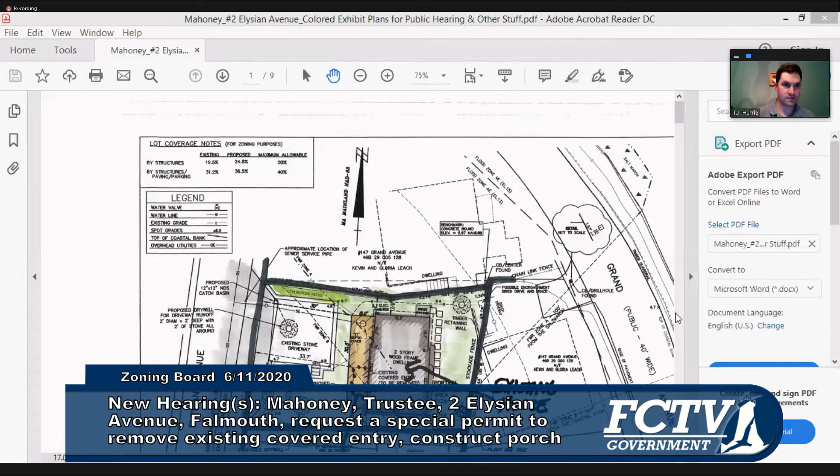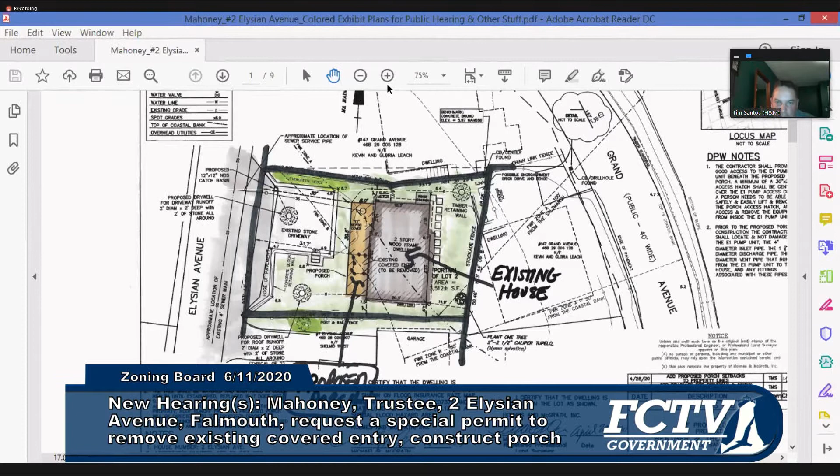Can you see that? We can. Okay, the property is located at 2 Elysian. It's currently developed with an existing single-family home and an attached covered porch right here. The property is currently a pre-existing non-conforming structure. It's non-conforming to the sideline, to the north and the south, and I'll zoom in. Currently, we are 6 feet to the north sideline and 4.9 feet to the south sideline.

The applicant is proposing to remove the existing covered entry and would like to construct a new covered porch. Those setbacks will be no closer than what exists.

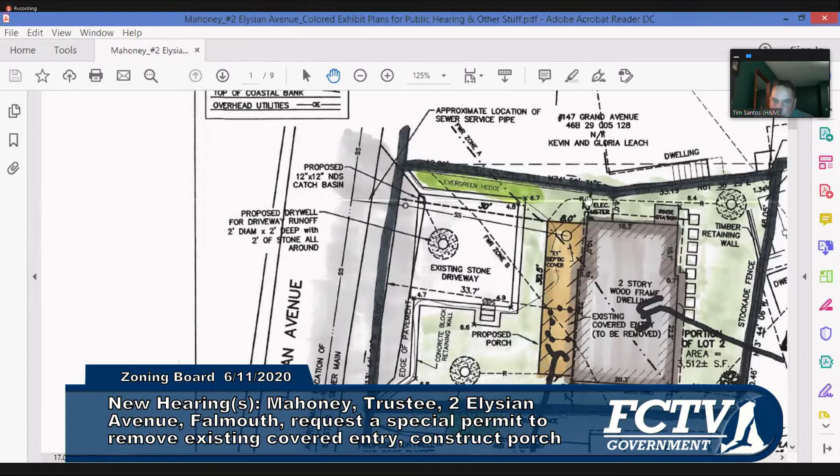It's actually 7 feet from the north and 7 feet from the south. So that is the special permit under section 240-68B for the minimum sideline setbacks of 10 feet. We're no more non-conforming than what previously existed. And we are also looking for a special permit from 240-69E for the lot coverage.

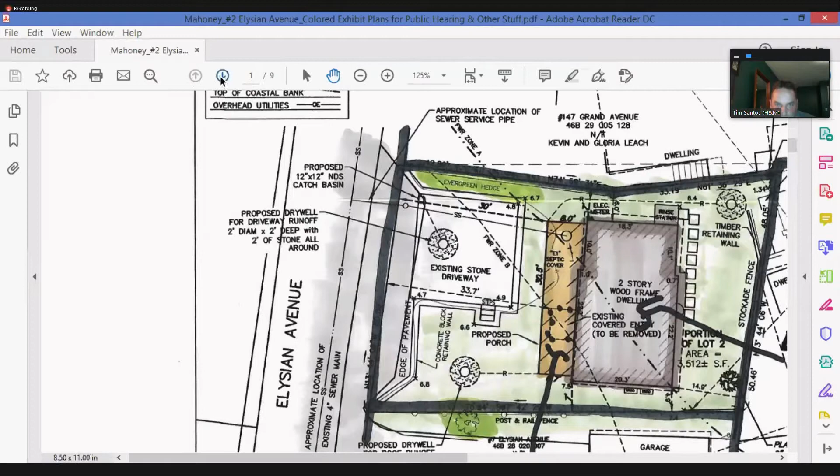We also submitted architectural plans showing the porch, if the board has any questions on those. I believe it's 8 feet off the north side and 6-7 off the southern side, and it's about 30.5 feet long. So we believe that it meets your criteria for the issuance of a special permit, and if the board has any questions, I'd be more than happy to address them.

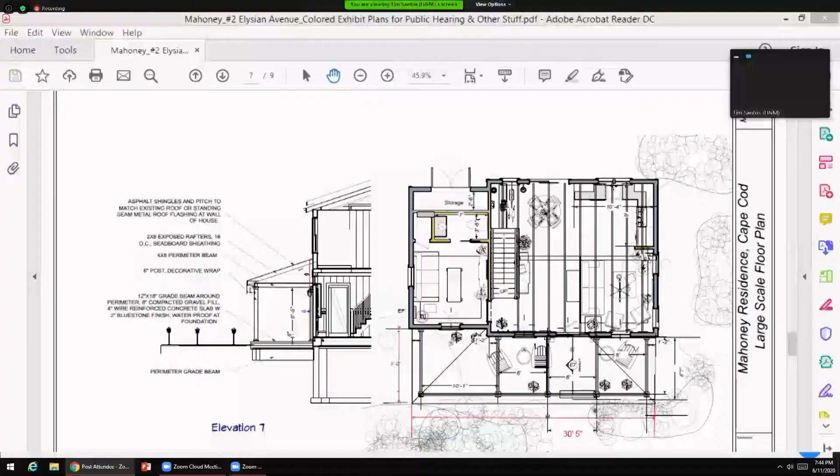Yeah, I'll share the screen again, just bear with me. If you look at the plan, there are DPW notes on the right side of the plan. We have spoken with Amy Lowell about how we're going to access that. An access hatch will be built over it. There'll be no sonotubes next to the unit, and all of the vent lines, the electric lines, and the sewer lines will be protected during construction of the proposed porch, if approved. We have spoken with her, and she was satisfied with the plan as long as we added these notes.

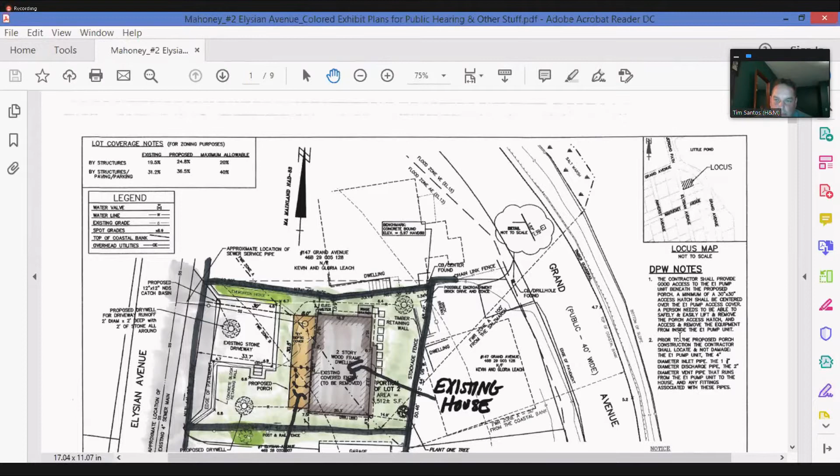Excellent, thank you. Thank you, Mr. Chairman. Thank you, Scott. Ed, any questions? No questions, it was pretty straightforward. All right, thank you, Ed.

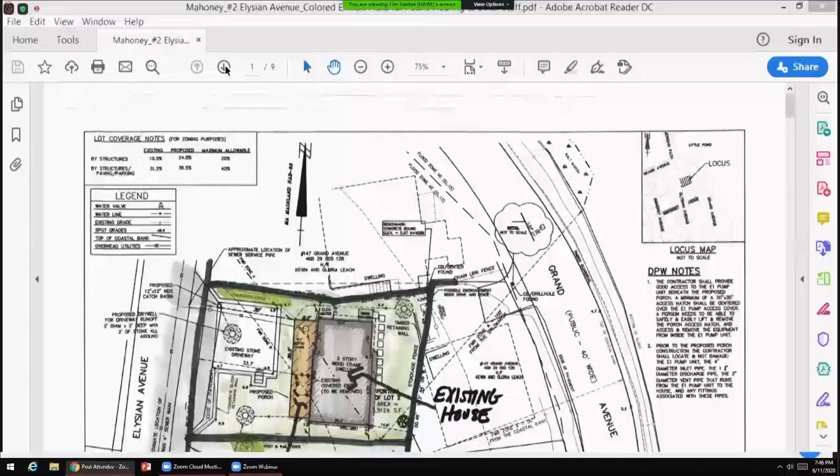And Mr. Santos, I do have a question specifically about those architectural pictures that Ken mentioned, and they would be A2 and A3 in the packet that you sent to us. It could be the angle, but it looks as if there may be an overhang that's going past the existing setbacks from the proposed roof for the addition.

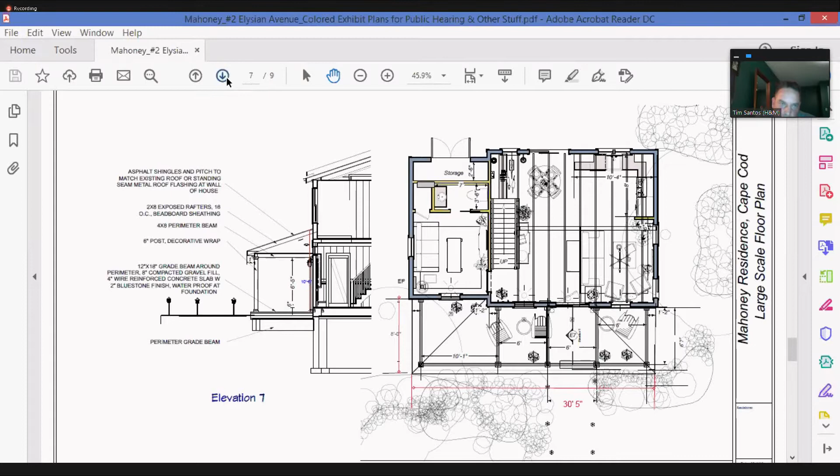All right, so if you look at this plan here, the 8 and the 30.5, or 30.42 - if you're talking about this overhang right here, can you see it? Sorry, I have to move everyone over. Yes, that, and on the opposite end as well, that's included in the 8 feet and the 30.4.

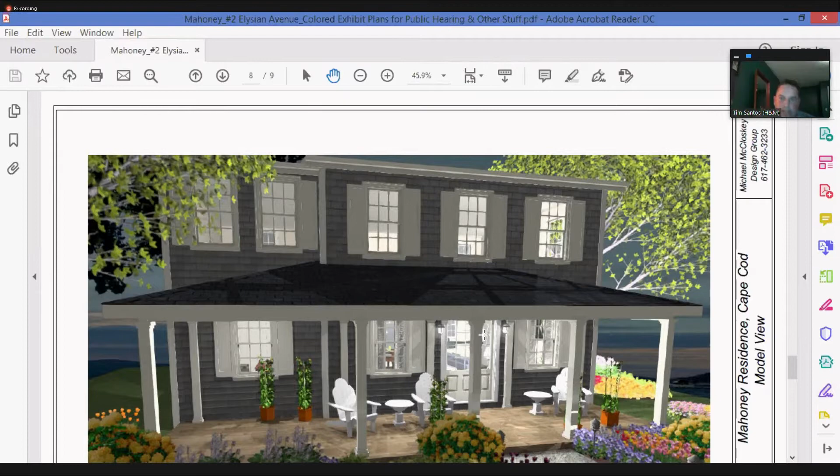Okay, so the actual patio below it is slightly smaller. So it's just a bit of an optical illusion there, the angle, I guess. Yes. All right. Thank you for the clarification.

Does anyone have any follow-up questions at all from the board? No. All right, seeing none, and there's also no public comment in the webinar chat. So is the board satisfied that we've heard enough? Yeah, I'm happy to move. Motion to close. Second. All right, motion to close.

I think that was from Bob and seconded by Ken. Full vote: Bob, Robert Dugan, aye. James?

Roll call: Ken Forman, aye. Ed Van Kuren, aye. Scott Zelinski, aye. TJ Hurry, aye. So the hearing is closed.

What would be the board's pleasure? Motion to approve with conditions. Second. Motion to approve made by Bob and seconded by Ken.

Findings: sections 240-3C, 240-68B, 240-69E, 240-216. The existing house is non-conforming to setbacks, 4.9 on the south side and 6.0 on the north side.

Applicant is replacing the existing entry with a porch addition. The porch will not encroach any closer than current setbacks, and the plan did setbacks to the overhang on the roof of the porch.

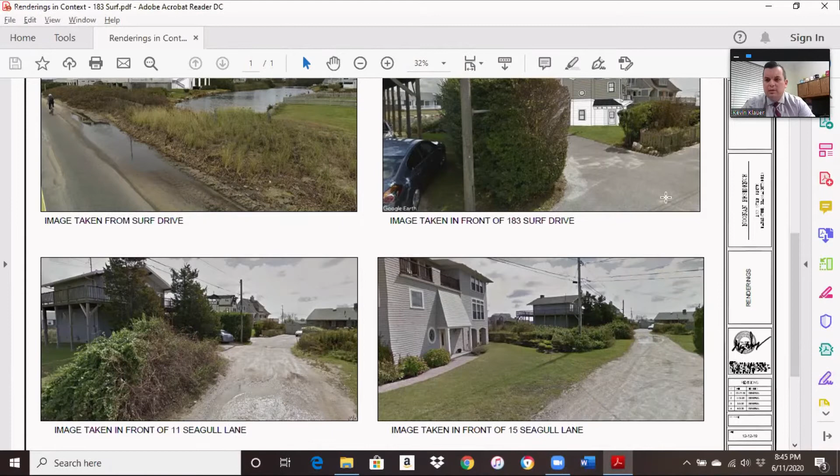So what we're showing is the image from Surf Drive, from the area that goes over Trunk River, an image of the structure directly in front of 183 Surf Drive, an image of the structure standing outside of 11 Seagull Lane, and then an image of the structure taken in front of 15 Seagull Lane. On the last one, I think you'll see that it's not even visible at that point.

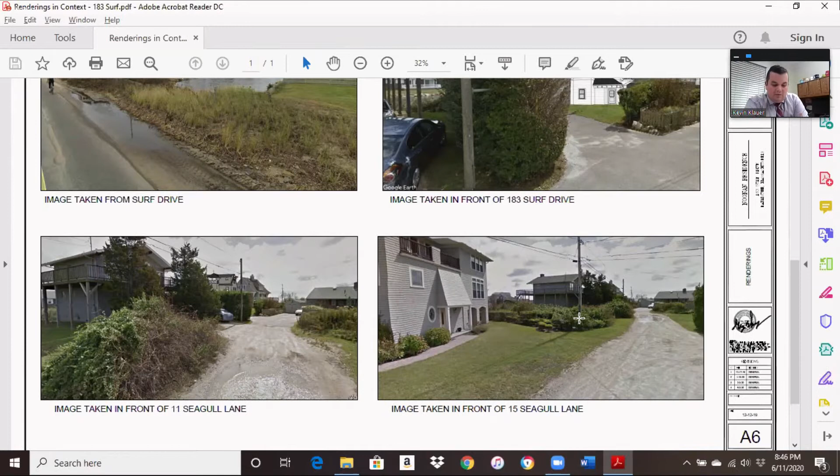It is a proposal that is in line with the surrounding properties. The concerns expressed by the owner of 11 Seagull Lane, Ms. Arquise, are positioned as though they're in the spirit of a neighborhood concern. However, these concerns are relevant only to her as the abutter directly to the rear. To the contrary, I think the neighbors support this. The board has consistently taken the position that they have not protected private views. Ms. Arquise does not hold a view easement, and she previously contested the permitting for 199 Surf Drive on the same grounds, being the same concern for her view. She's seemingly of the opinion that she's entitled to a water view, but no one else is.

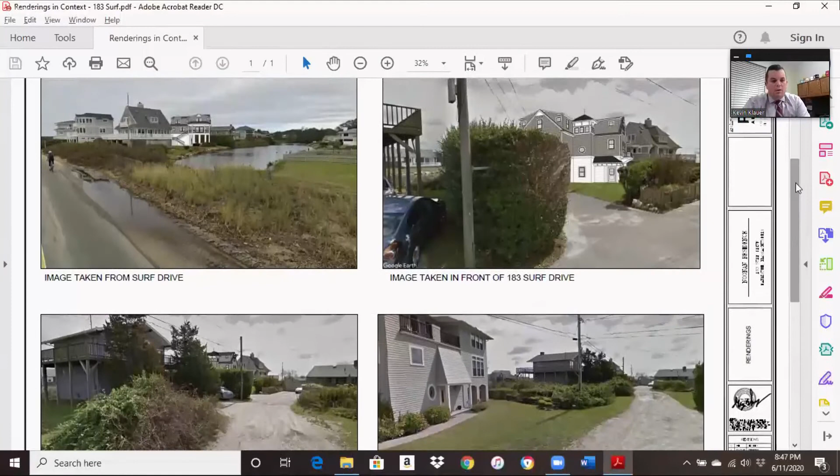Despite this, and I think this is instructive on the renderings, you'll see that Ms. Arquise will still have a very considerable view over Trunk River, Surf Drive, and Vineyard Sound.

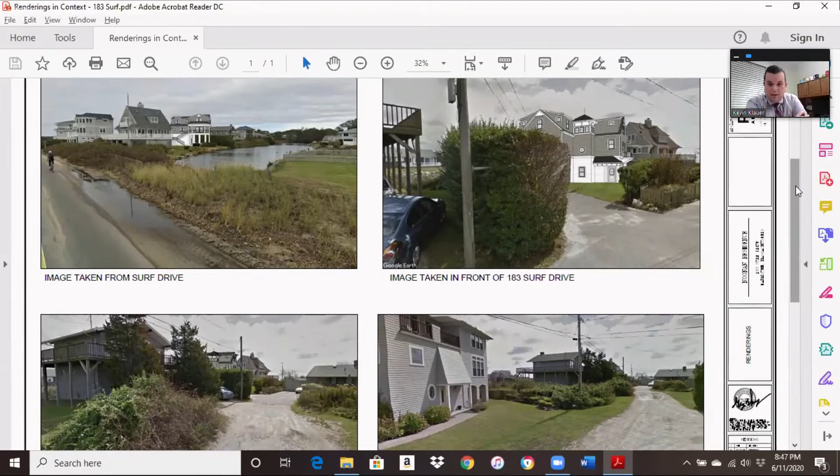It should be noted that if the Noonans sought only to reconstruct their existing house, similar size but raised to meet the flood zone elevations, to comply with those flood zone requirements, the resulting structure would have a much worse effect on the view held by Ms. Arquise. We previously submitted a lot comparison worksheet showing the lot size, footprint, and gross building area, because these are the standards the board has consistently used to evaluate the size and height of the structure relative to the size and height of the structures in the neighborhood, which is the standard in 240-69E.

I'm not aware of a situation where the board's chosen to disregard certain properties not accessed off the same street. I think to say that the houses in front of this on Surf Drive are not part of the same neighborhood is not a compelling argument. I think that this is an area that is really tied together.

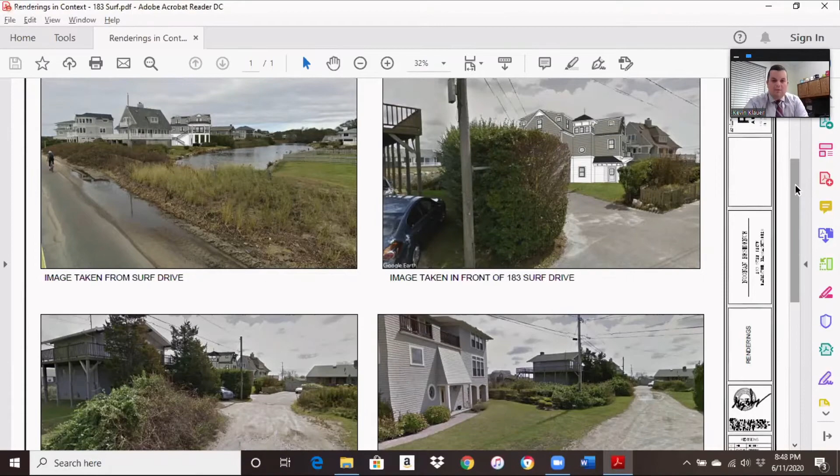Of those 26 dwellings that we did show the lot comparison for, 8 of them had higher gross building areas and 7 had larger footprints. We did also submit those photographs of 25 Seagull Lane, 17 Seagull Lane, 15 Seagull Lane, 11 Seagull Lane, 181 Surf Drive, 189 Surf Drive, and 199 Surf Drive, which I'd be happy to show.

Could you pull up the map just showing where those properties are? Sure, I'd be happy to. I'm going to have to use the GIS map, so bear with me.

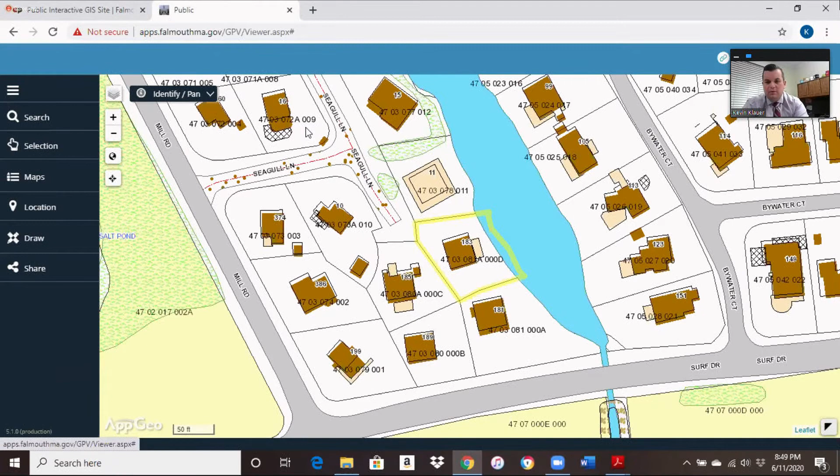So what we are looking at is the GIS map of the immediately surrounding property. We submitted the photographs of the properties at 19 Seagull Lane, 15 Seagull Lane, 11 Seagull Lane, 181 Surf Drive, 189 Surf Drive, 199 Surf Drive. So three houses to the south, three houses to the north. Of the 7 nearest properties, 4 are built of similar size and similar manner to what's being proposed, including the home of Ms. Arquise.

In just the last few years, the properties at 181, 189, and 199 Surf Drive have all been raised and rebuilt in order to comply with those flood zone standards. More will be required to do so as we move forward. Just 2 weeks ago, this board approved a similar proposal at 335 Surf Drive, essentially the same neighborhood, same proposed height. There was no real question as to whether or not it was a good project because it was an improvement over the existing situation, an improvement to the flood zone standards.

I think that we have to look at the totality of the situation here. We have a significant improvement to the property. We have an elimination of a non-conforming front yard setback, their compliance with the FEMA guidelines and the building code for flood zone construction, which really isn't an option. We're improving the vegetation in the resource areas. The project's in line with the neighborhood, and it's supported by a number of neighbors. The proposal is not substantially more detrimental than what exists.

And if you look at the GIS map, these three houses here are elevated. 11 is elevated, 15 is elevated, 19 is elevated. I think this house is not the one that's changing the character of the neighborhood. This house is staying in character with the neighborhood. As I mentioned previously, if they were to take the same exact footprint and build on that footprint in its exact location, the result would be, I think, much more detrimental to Ms. Arquez.

And I also would say, about the point on the setback to the river, we're not coming any closer to the river. I think that is a misstatement. We're maintaining the exact same 9.2 foot setback, and there is also a setback on the other side. It is not coming closer to the river than exists today. It's coming a little further south, but it is not by any means closer.

I'd like to also comment on that. Greg Cernium, for the record, Rescom Architectural. I thought maybe Tim Santos was going to join us, but one of the things that Holmes and McGrath had presented to conservation for their approval was, although we were maintaining the setback, we did a square footage analysis of how much of the building previously was within that setback versus the proposed. It was either matching the same square footage or actually less, and that was something that was presented to conservation.

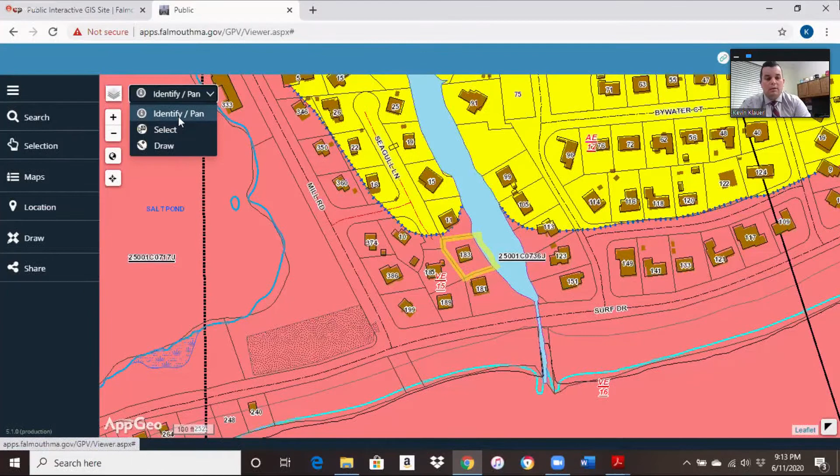For some reason, it seems like anything coming in from the main road is being bypassed in all the presentations. I don't know if I'm assuming that's just an oversight and no one doing it on purpose, but you don't get a picture of the neighborhood from the angles of these photos. If you come in off of Mill, it looks like a completely different area than if you're directly on Surf Drive.

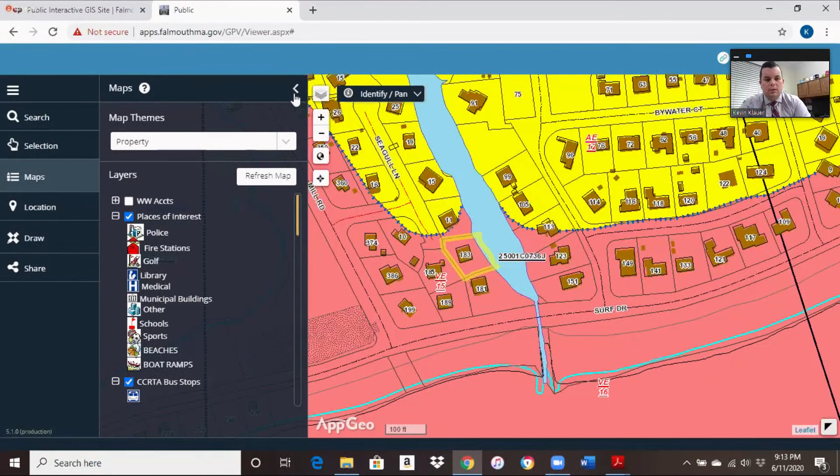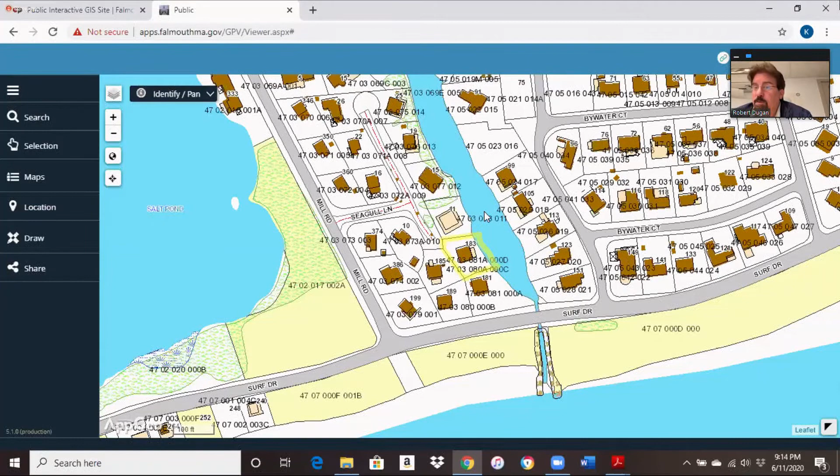It's the only one that's out of character. Right now, 183 and 185 are in character with the neighborhood. If you drive in there from Mill and do the whole turn, 183 and 185 seem in character. The ones that don't are 181, 189, and 199, the three on Surf Drive. Actually 181 is a little bigger lot, so at least it doesn't encompass much of the site. But I think the ones affecting the neighborhood right now are the ones on Surf Drive, 199 and 189.

I think we've shown there are much larger houses along Seagull Lane—15, 11, 19 are larger houses, 15 especially. We're looking at an average of the neighborhood and an overall effect. I don't think the addition of this particular structure changes that, especially because it's currently surrounded by three abutters that are also elevated structures. But I don't mean to get into any sort of tete-a-tete, and I understand what you're saying, I'm just explaining the rationale. No, I understand, that's just the issue I'm having, and the other members may not have an issue with that at all. So you may want to hear from the other members and see what their opinions are.

All right, we'll do just that. Let's see, Ed, what's your opinion? I'd go along for jacking it up. The neighbors that are real close to it have said they were for it, and it's inevitable—sooner or later it's got to go up. So I'd say go for it. All right, so you'd be in favor of the project as proposed right now? Yes. All right, yes. Sorry for being redundant, I'm just trying to keep track of everything virtually here.

Clarity. Let's see, Mary, how do you feel? I would be against it. Okay. And I'm assuming that's for the reasons that Bob stated, or do you have anything different? I think he pretty much captures it as well as what was stated by the lawyer.

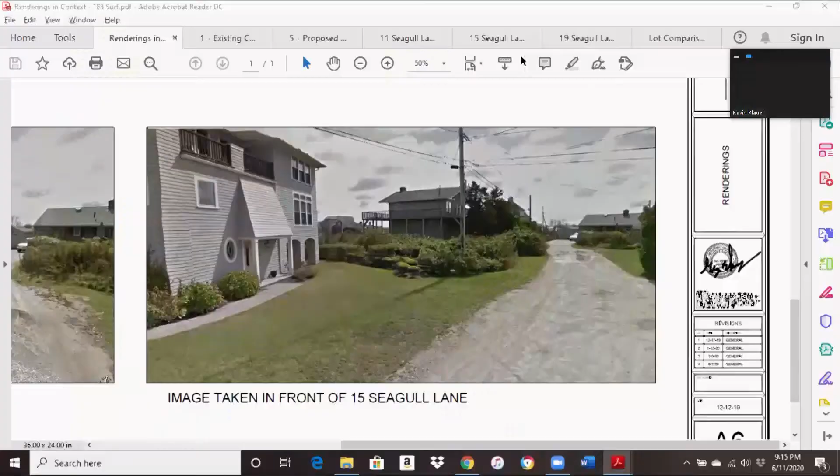I would only point out that we did submit the lot comparison worksheet, and I will share briefly. As we look at it, there are a number of buildings in the area that do have larger gross building areas. It is by no means an outlier. I believe I said there were eight of the buildings within this radius have higher gross building areas.

It is an increase over what is there, there's no question about that. But part of that is due to the necessity of compliance, and while it is larger than what exists, I don't think gratuitous is necessarily the right word. I think it is realistic. But again, that is a discretionary and subjective matter.

So, as it stands now, you have two members positively in favor. I'd be in favor if the project was cut down a little bit, and I guess from two members it would be an absolute no at this point. I'm going to have to ask for a continuance because I need to speak with my client and assess what the options are.

I guess to the two members of the board who said absolutely no at this point, would anything turn you in favor of the project? And Attorney Klauer, I'm trying to help you out, and help the board out too in terms of scheduling. Would anything at all turn you in favor of the project, whether it's scaled down, and if so, to what point? If they scaled it down, I'd relook at it.

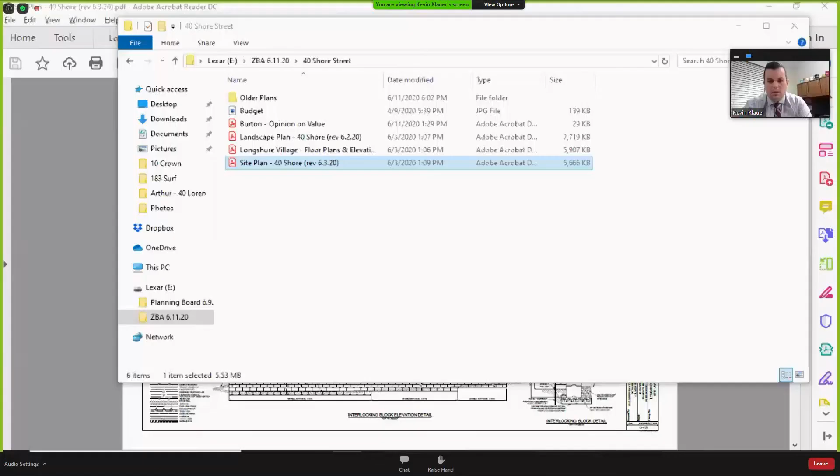So what we're looking at is here, and there's been a number of changes over the course of the last six months or so. Building 1 has gotten larger. There's living space above the garage, correct me if I'm wrong, Mark. The garage was added to that building based on board comments, and living space was added above it to increase the square footage of that lot. So that is a 3-bedroom home with a 1-car garage.

Building 2 is also a 1-car garage and a 3-bedroom home. Building 3 is a 4-bedroom home, that's where the 4th bedroom was added. There have been some changes to the dormers on the 2nd floor to accommodate that, and it's also a 1-car garage. Building 4 is a 1-car garage and also a 3-bedroom.

Building 5, let me just confirm that. Building 5 is a 4-bedroom home with a 2-car garage, and that is the only 2-car garage on the site at this point. Buildings 6, 7, and 8 all share this motor court here, and they're all single-car garages as well.

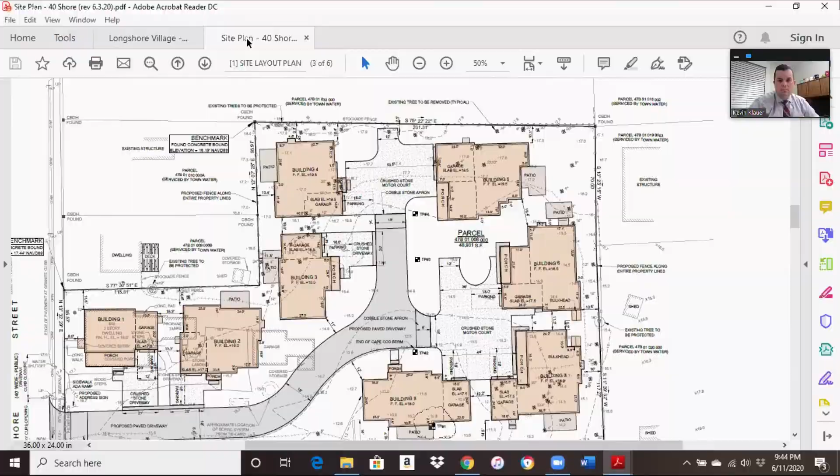Any follow-up questions from the board at this point? Not here.

Thank you to Ashley for reminding me 9:45 is coming up in one minute. Would anyone like to make a motion to extend the night? I'll make a motion to go to 10, but I don't want to go beyond 10. Second, to extend the meeting until 10 o'clock. That motion was made by Bob and seconded by Ed.

Roll call vote. Bob? Robert Dugan, aye. Ed? Ed Van Kuren, aye. Mary? Mary, aye. And TJ Hurry, aye. All right, so we're going until 10 o'clock. Thank you, Ashley, again for the reminder.

All right, any follow-up questions from the board? Not at this time. Okay.

If I can ask a point of order, because I always get tripped up on this. My understanding is with a comprehensive permit, it's a simple majority vote. I guess this is to Ms. Stockman. So on a 4-member board, it's a simple majority of the members sitting, so we'd be looking for three votes. Is that correct, Ms. Stockman? Yes. Thank you.